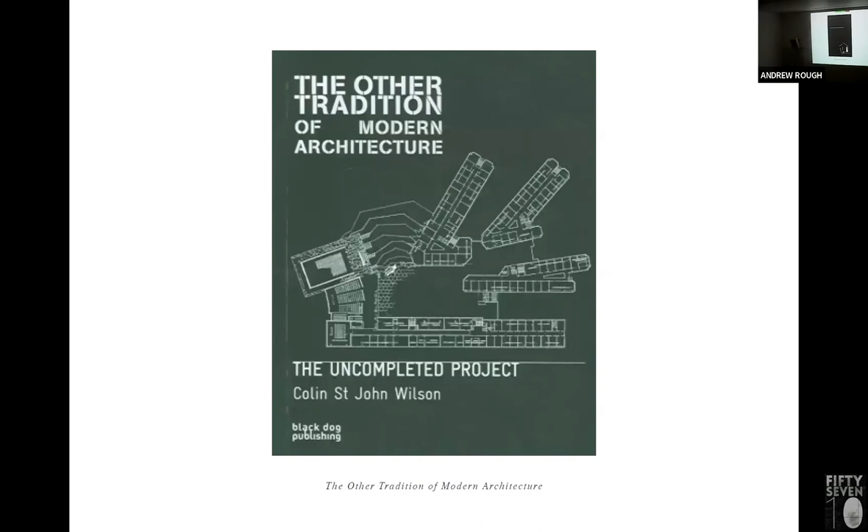So we draw a lot in the studio. We could draw more, as we've missed it, particularly in the last couple of years. Keen to get back into the studio, we like to get the rolls out and draw and think about ideas, and draw over each other's drawings. We're not precious about these things.

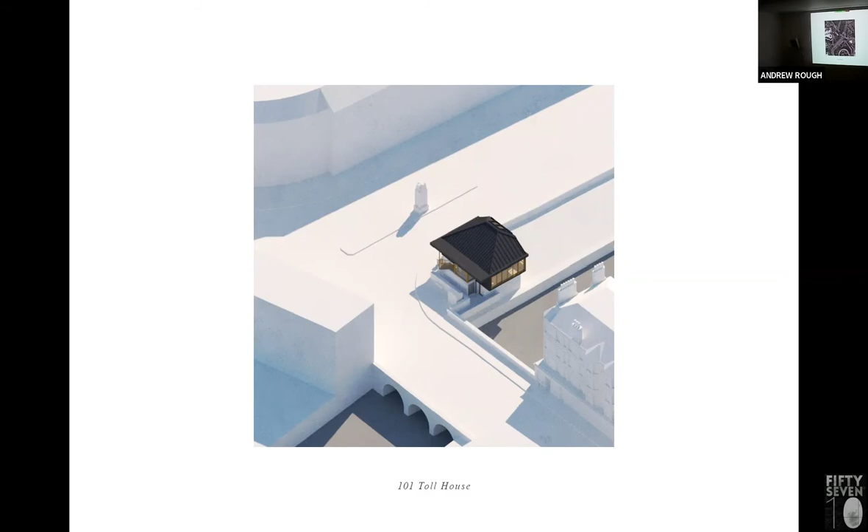So that's an aerial view. If you go down through the New Town, to the north of the New Town in Edinburgh, there's a major street called Dundas Street, and this confluence flows from Broughton Street, from Dundas Street, and from Trinity, all joining at this junction. Underneath, you're not really aware of the Water of Leith as it tracks along, because it's beneath the city, but it's a very significant node.

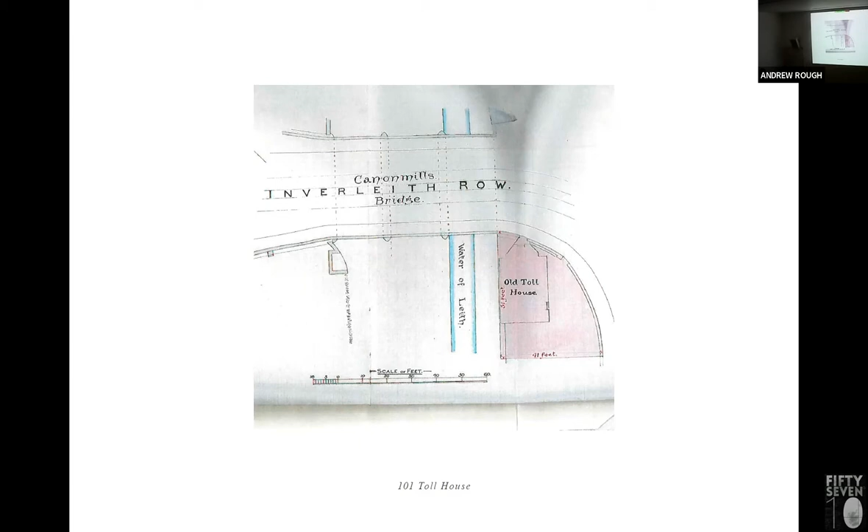It was the site of a former old toll house, where the bridge over was in and out of the city. There was a building on the site prior to what's there now, that acted as the toll house for the bridge. It's now, and has been since the 1980s, public toilets.

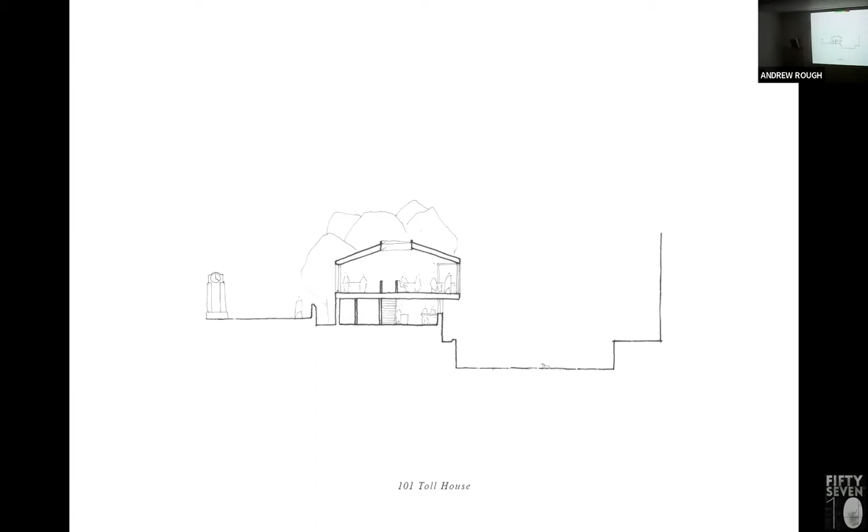So the first thing we thought was important immediately was the section - what do we do with this? We were really confined by the footprint of the building and very small slivers of land, so we couldn't go out the way, we had to go up the way. Instinctively it was thinking about what we do with these inherited features of the surrounding city - thinking about light, about connections through windows, about the relationship to trees.

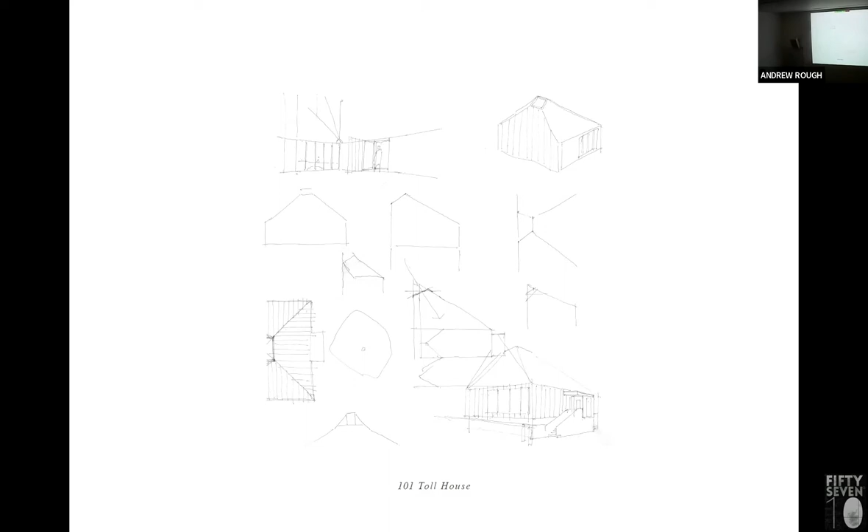We're constantly scribbling. This is a model from the water side, and effectively what we did was take the roof off and extend up to create a new pavilion that sat on top of the existing brick enclosure. What was important to the project was that we had to work with the existing structure and foundations, as well as the significant issues of proximity to the water and significant bus routes.

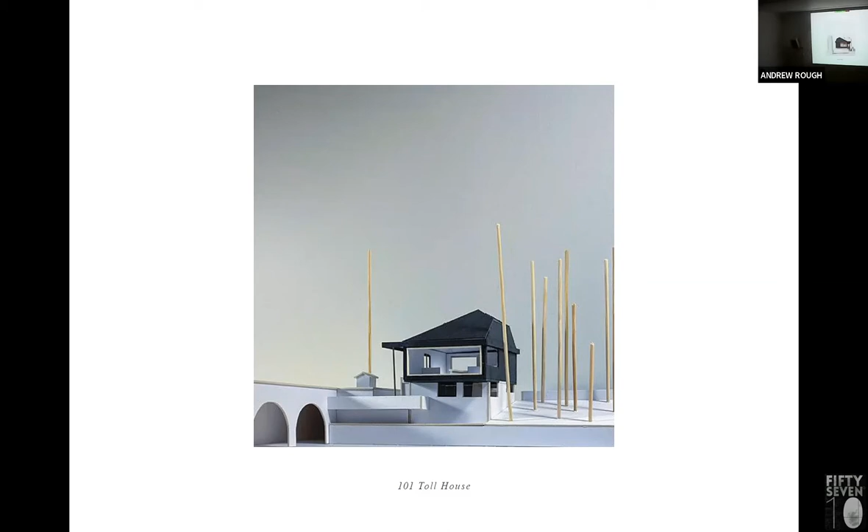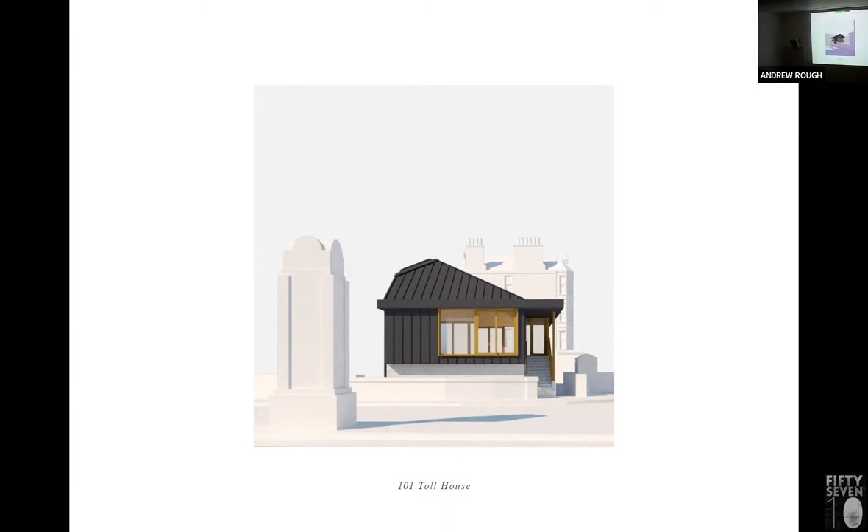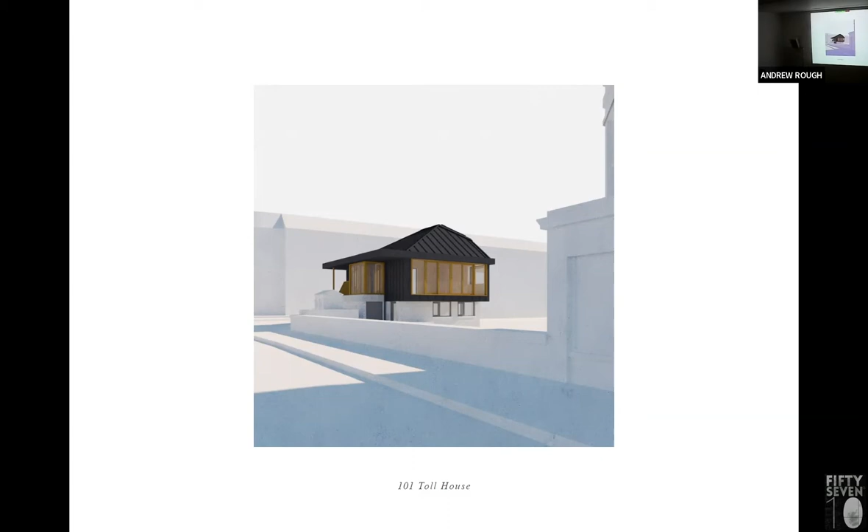There was a small set of steps down to the footprint of the existing building. We've reversed that and put a set of steps up that actually animates the corner of the site and opens out onto the corner. There's then a big window, a civically scaled window that looks back towards the clock. Another big window, for obvious reasons, opening out over the river. We cantilevered the pavilion front and back to try and get as much bite in and get some more space, really for the use of it. And then the new entrance lobby on the corner, which axially was positioned so that as you moved up and down the stair and in and out of the building, you were focused on the really beautiful mature tree on the corner. And then this smaller horizontal window.

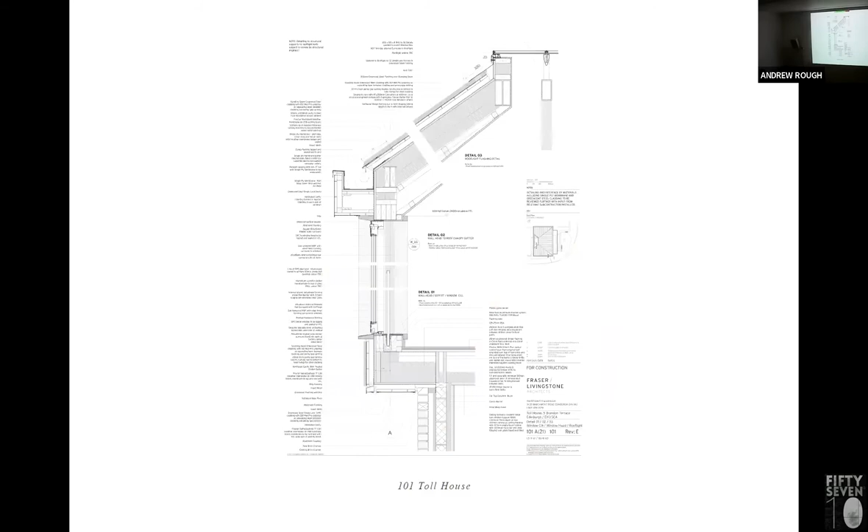What we had to do was make sure the building could be used appropriately, and it couldn't all just be glass because of the small footprint. The building was designed initially for a developer client we're working with, and he wasn't totally sure what he wanted to do. Through evolving the brief, we eventually settled on a restaurant building, primarily because of the confined nature and footprint, and also issues of access for public buildings.

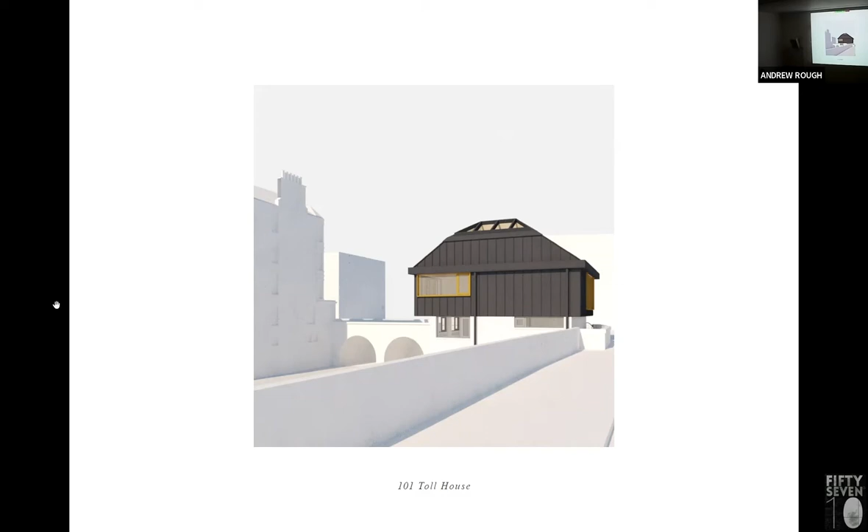So the other key move I forgot to mention was the section. This image is a little bit abstract in that you wouldn't really see or experience the building as you see it here, because you've got lots of trees in the way. As you move up that forestair and round the corner, you come in and you've got this big trapezoidal roof light that catches the sky - another significant move that we wanted to use to make you more aware of what was already there in the city.

So the other issues in a practical sense were just how we cantilevered out over it, and what materials we picked had to be lightweight. We couldn't extend it up in masonry - it would put too much weight onto the existing structure. So it's a very lightweight structural steel frame with timber infill.

We selected - we thought about timber cladding, but in proximity to the water and also the busy vehicle route in and out of the city, we just felt it wasn't appropriate. Also, because of the close proximity of trees, we felt it wouldn't weather well over time. So we ultimately ended up with a metal cladding that could wrap the new form, with a new language that sat on top of what was then proposed to be painted white. It gave it a new identity.

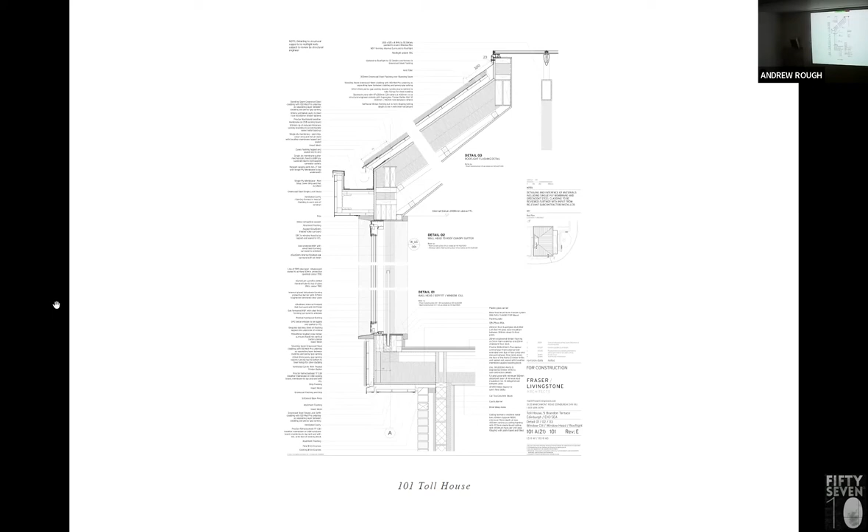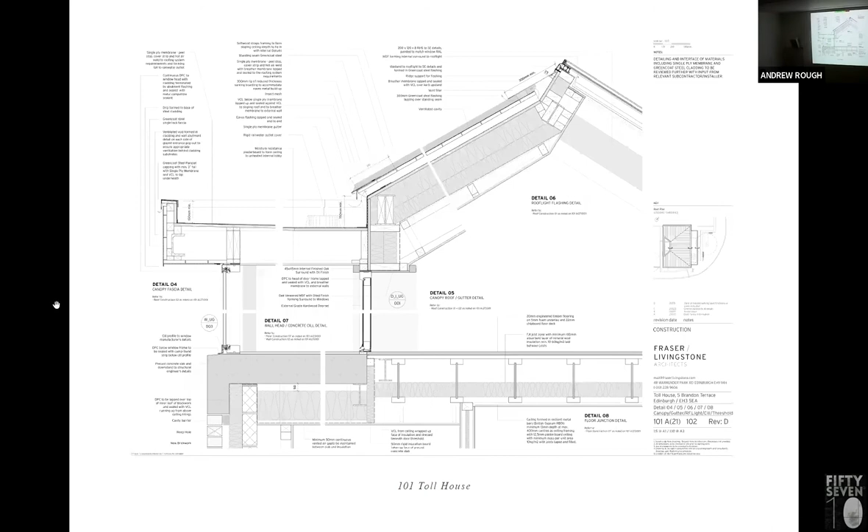Other practical things - we couldn't get rainwater off the roof and into gutters when we were cantilevering out over the water. So it fast became apparent we actually needed to get essentially a gutter all the way around the building. We played around with different options and ended up with this quite chunky, robust gutter system that allowed it to feed into rainwater pipes, getting water off the roof and also helping with long-term maintenance. So it's about thinking through these practical things while also creating a language for the building - one that sat and created a canopy over the forestair and the entrance through the trapezoidal roof light, the upper level, and then the entrance lobby canopy.

So these are just a series of photographs. It's getting towards completion. There's a new restaurateur just come in recently who's going to take it on - a Michelin star restaurateur. You start to get a feel for the connections.

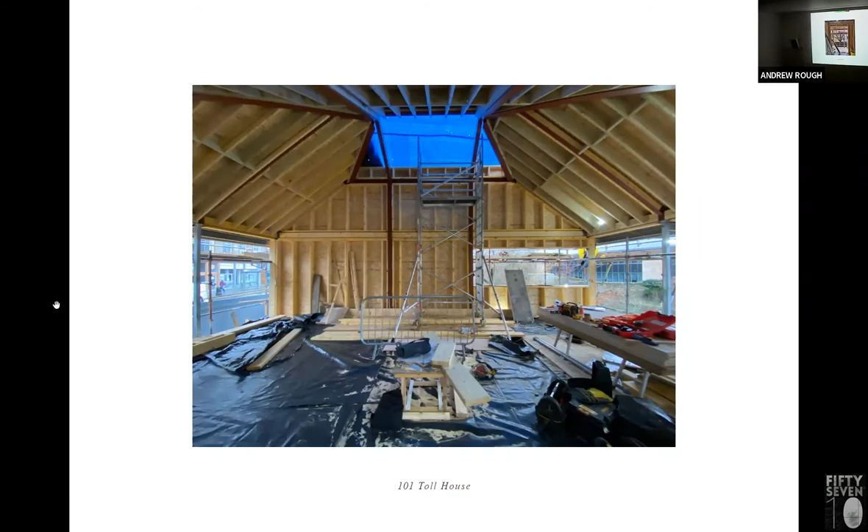The river to the right-hand side, and the longer views down the river to the west. The city to the left-hand side, and although it's covered in blue tarpaulin in this photograph, the treetops above. Then as you turn to go back out the way, that tree faces you through the glazed entrance door - that's the inner lobby door, looking through the new lobby.

This is it starting to get lined out. You get a feel for the connections to the clock. We were thinking about this where there's always double-decker buses sitting, and how that could be a really nice moment moving around the city in and out, with people getting glimpses into the building.

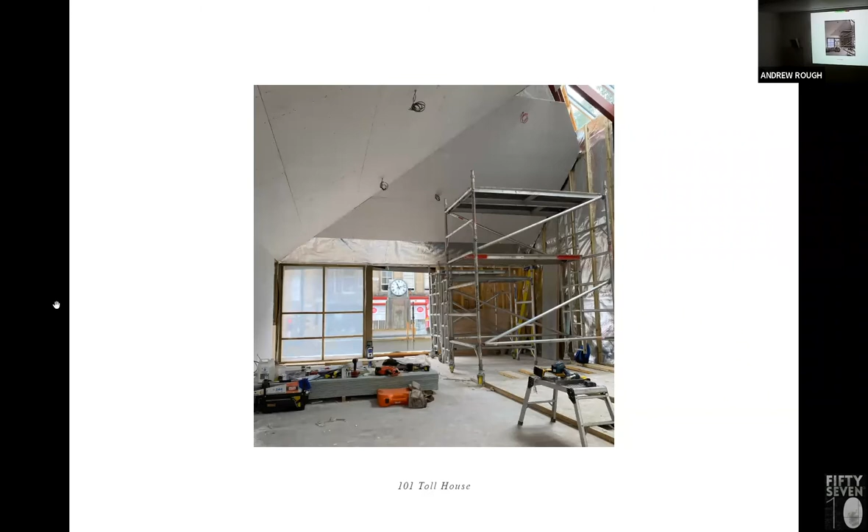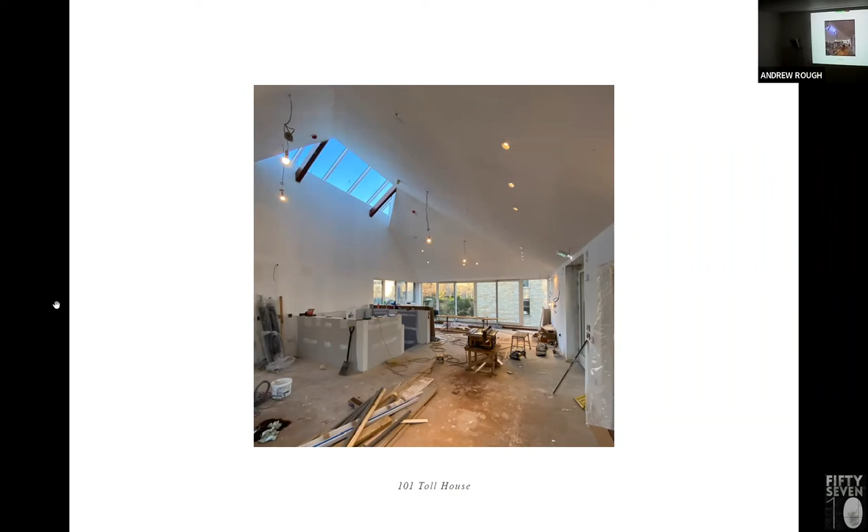So it became almost more civic in nature. Start to get a feel for the sectional qualities. You can't see the tree tops there, but they are there. Again, it's just because it's the winter time, but you'll get the tops of the trees projecting up into the sky.

But there's also then going to be a terrace that projects out over the water. And then you get a feel. So it's going to be called the Toll House, which has had some unkind jokes about it, with it being a former public toilet, but we still like the idea that it speaks of the history of the Toll House being on the site.

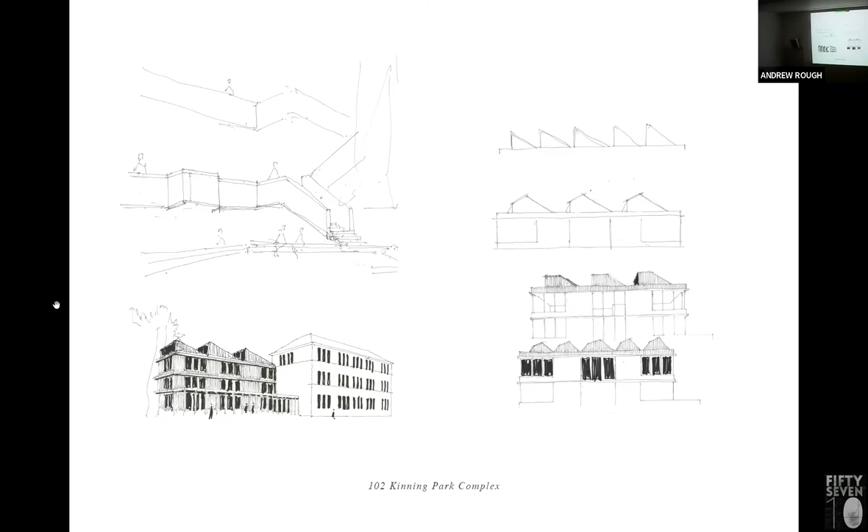So these were some images that Andrew in the office did. You can see the entrance there, just that sits between that colonnaded cloistered walkway, and then the timber-lined stair heading up through the centre of the plan with office wings on either side. And we wanted to build it in solid timber construction.

Malcolm Fraser Architects did a number of buildings, including a nursery building for the University of Edinburgh in CLT, and we also did another building for the university called the Edinburgh Centre.

That's a preoccupation of ours. We're obviously aware of the climate emergency, and we think it's important that we push this as much as we can. Malcolm in particular is engaged in advocacy work and lobbying to try to create a local Scottish industry that uses or produces mass timber, rather than us having to import it from Spain, Austria, or Germany.

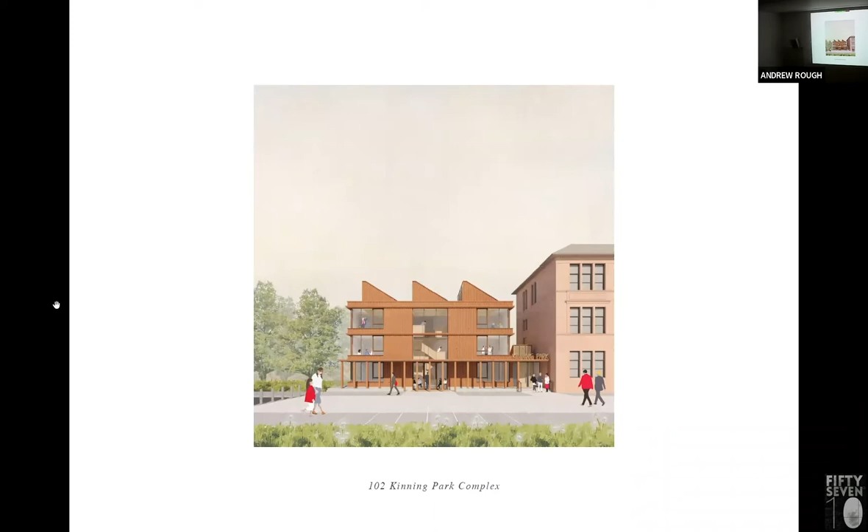So it was a CLT structural building, and we were keen that the insulation externally etc. would be a lightweight cladding. So we looked at a vertically corrugated metal cladding, but that still spoke to the existing school building next door.

Just a cutaway section showing the roof lights, bringing the light down into that vertical circulation space, and then that timber-lined staircase and void with the forum space below.

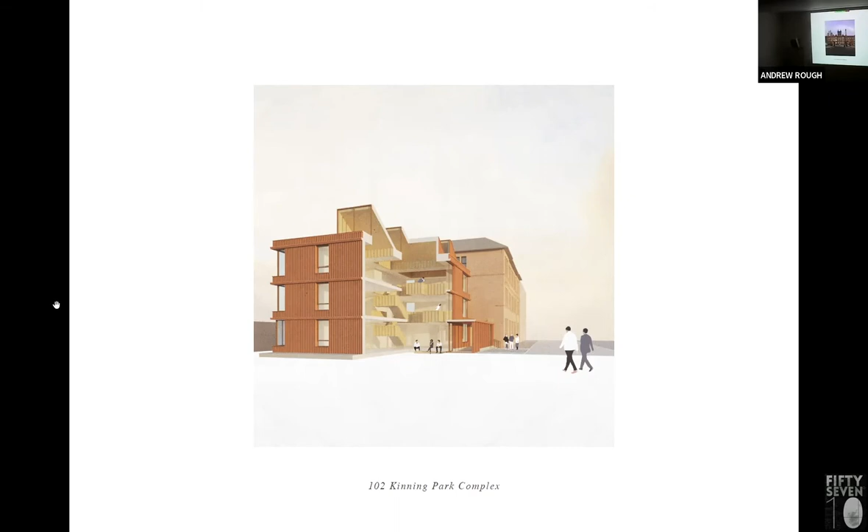Lots of this thinking we employed in other buildings. We like to use timber internally. At Scottish Ballet in Glasgow, we created a new central gathering space there that's timber lined. The Netherbow, and various others, were done formerly by Malcolm Fraser Architects.

This was another early project. Thackray Medical Museum is down in Leeds. It's close to quite a deprived residential community called Hare Hills. I think I'm right in saying it's one of the biggest medical teaching university campuses in Europe.

This is a museum building, but you can see the tower over the top of the building on the left. It's for nursing, midwifery, and for doctors as well. So this is a museum building that they wanted to develop.

They were actually going through an initial phase that Simpson and Brown were leading when we were asked to look at opportunities for a second phase. That work, I think, is completed quite recently.

So they've done lots of good internal refurbishment work. Longer term, they're thinking about converting other elements of the building into conference facilities and other uses. With the building they have, they wanted to reach out to this community that passes their front door every day. It's quite a severe, closed-off building, and they wanted to encourage more local residents to actually come into the museum.

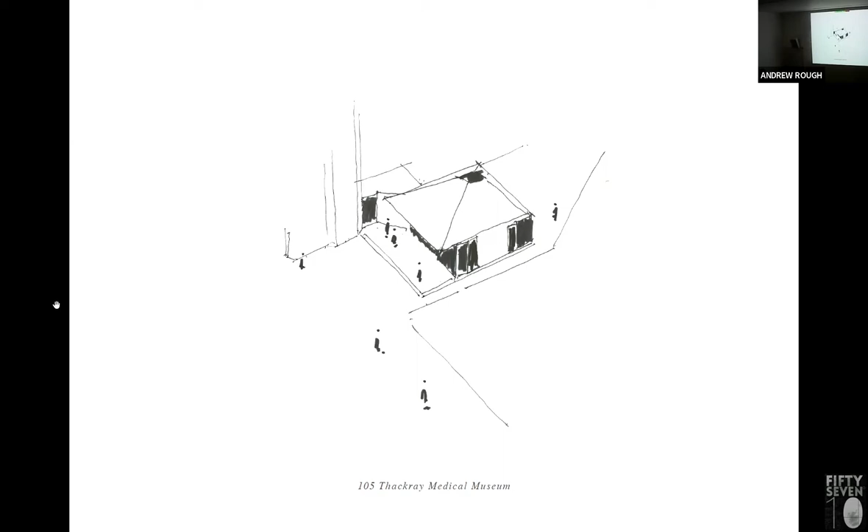So these are little scribbles about how we might engage with the existing building, create a new multifunctional space that could be used by the community, could be used by the museum, engaging with the existing building, but transforming it in as subtle a way as possible—something that acted as a lantern, I suppose, to the community.

So this was just a very quick idea of where the building might sit, how it might glow, how we might illuminate the existing tower, and how it might reach out physically and visually to that route in and out, heading into Hare Hills and back into the city centre.

And then you can maybe subtly see we were interested in the use of two different colours of stone externally, as well as feature brick banding of two different colours.

So we liked this idea that we might create a promenade that would be a shared surface lined in cherry trees—there's a huge cemetery directly across the road. We'd create a promenade to the entrance, and this surface acted as a threshold that almost felt like it was part of the existing building.

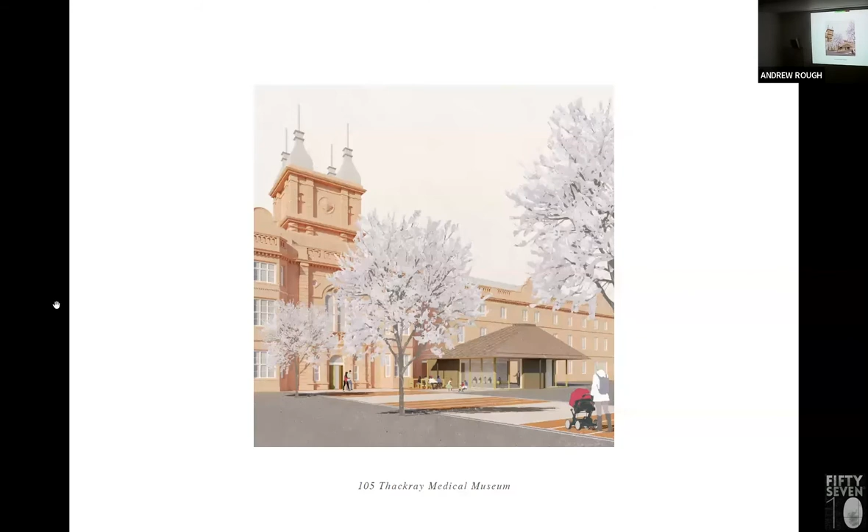So you can see that surface treatment leading up to the entrance, and then this new lantern pavilion sitting to the side, and how that might open up. It might create a space at the front of the building, as well as be used in a multitude of ways.

This is a project that I worked on back—it's now going back 12 years ago. It's a housing project on a site to the north of Kinross and Milnathort, in Perth and Kinross.

It's a mature woodland, and just in the middle of it there's a clearing that was the site of a former tuberculosis hospital—a really quite large, imposing building on the skyline. That sat in the middle of the site and then had lots of outbuildings. So when you were severely sick, you would be in the main building, and as you started to recuperate, you would move to the outbuilding stretching out to the east.

You can see it slopes up to the north—this is the start of the Ochil Hills that really begin here and stretch west through Clackmannanshire. That's the woodland in the foreground, with connections south down to Kinross, to Milnathort, and all the way back to the Pentland Hills, way past Edinburgh in the distance.

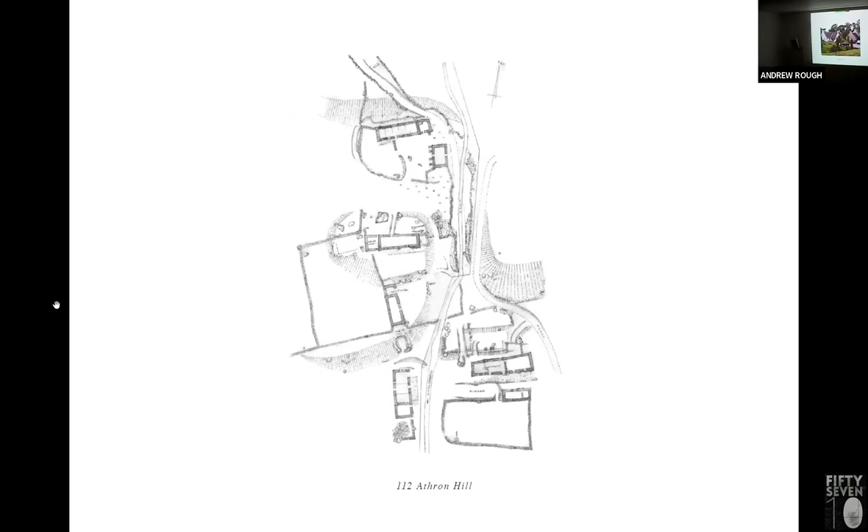These are different buildings—the one on the left is just outside Bankfoot, heading out to Perth. We're interested in that simplicity of form. An important preoccupation for us is that striving for a sense of calmness, but also a character as well.

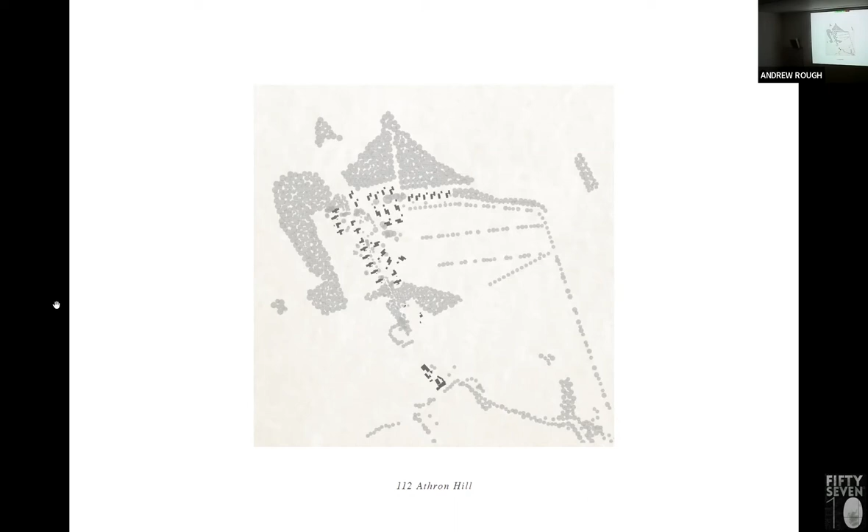So the site plan—the lower darker block is an existing farmsteading that sits off the site. There's an existing linear route that stretches north and then swings round to the left. What we did was essentially start to stitch these into the mature woodland. There's a pond in the middle of the site, or areas across the site, and we had to come up with a sort of kit of parts of houses that responded to the different character areas.

This went quiet back at MFA days, lay dormant for a while. Then when Malcolm and I set up again, the client came back and said he wanted to get the site moving. We were initially instructed to take forward the first 11—it's 35 houses in total. There's a core site, essentially the woodland, and the ownership is much larger. There's a reservoir to the north, and lots of land to the east and west—if you move into this community, you get shared ownership of the wider parkland site.

We came up with this idea of a toolkit of houses. As part of the planning consent, we enshrined the principle of a basic house that over time you could extend—with a granny flat, a home gym, whatever you wanted it to be. We also enshrined the principle of a limited palette of materials that allowed a natural variation to occur depending on what each purchaser wanted for their own home.

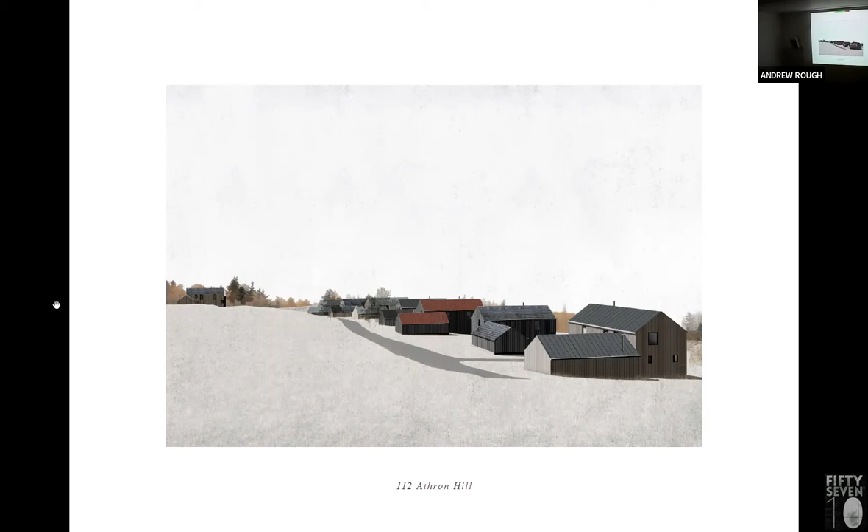So you start to see these buildings turning against each other, creating entrance courtyards, as well as connecting to longer views, and how they start to set up a rhythm against each other, turning against each other as well for privacy.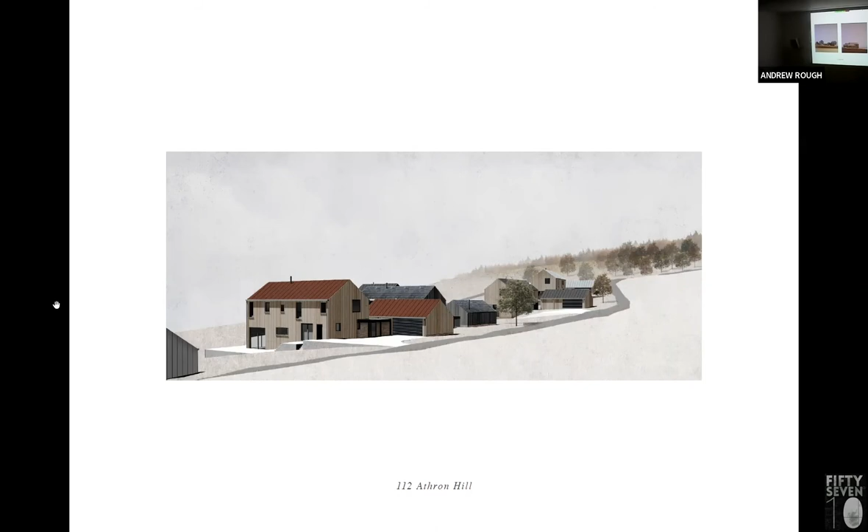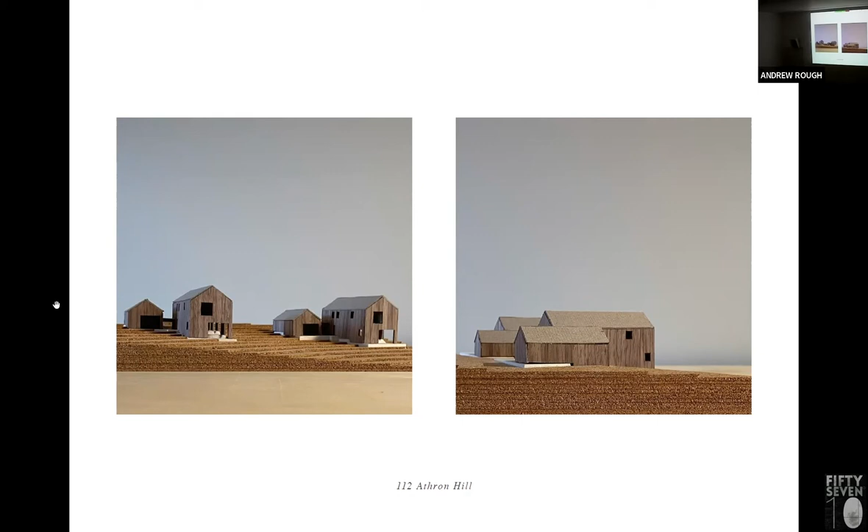And you start to get a feel for the steeply sloping nature of the site as well. As part of the first stage, we were asked to look at two house types. We had to refine and, that dreaded phrase, value engineer them to get them to stack up in terms of a funding model as a kickstart development.

So these are some of the marketing visuals. The idea is that the buildings are turned, and rather than presenting a look towards views, we presented the gables. It's obviously a very sensitive site, and to get the planners to buy into the idea of development, that was a really important step, to turn and present gables, so you could see through the built form to the woodland and natural environment beyond, addressing the issue that other developers may well have gone down the route of creating a slab of development on the skyline.

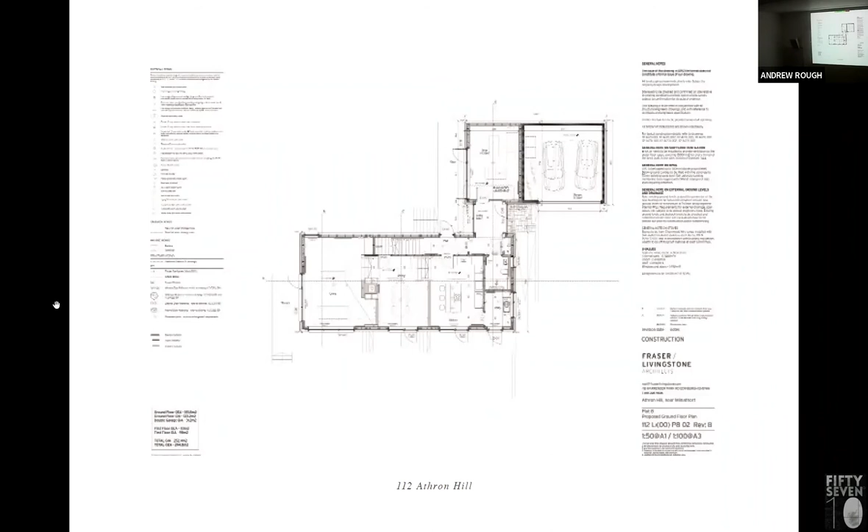So these house types integrated garages, snugs, and entrances between, working with an L-shaped housing type and a sort of slipped-plan H or Z-shaped house. You can see in the section it's open plan right the way through the ground floor, working with the steep slope to create living spaces and how they connect, with a fireplace sitting at the centre.

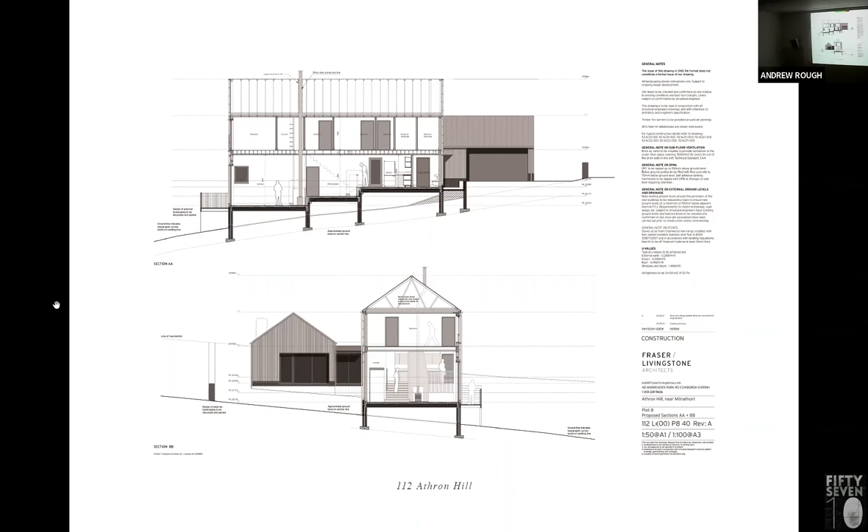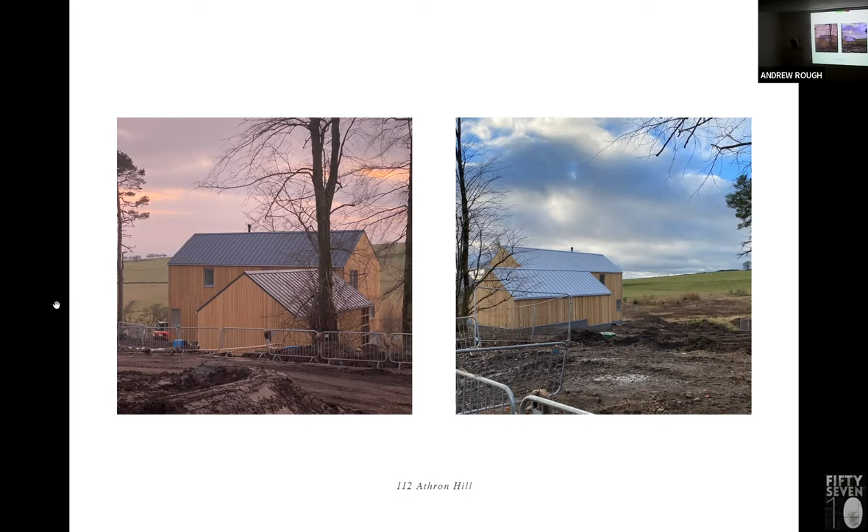These are just some recent images of the L-shaped house and the slipped-plan shaped house. We're using an open-boarded larch cladding, which is used in lots of the surrounding agricultural buildings, as well as metal standing seam roofs of different colours and variations. You get a feel for the open-boarded cladding there, how it sits against the trees, and then the views through.

So the thin house footprint really allows a different approach compared to the volume house builder housing happening across rural Perth and Kinross, which places all the emphasis on making it look like your own castle with the front door facing the street.

So these have all gone - I think we hit the market at the right time, there was such demand. We've now been instructed to take forward the next phase of another 13, and just a couple of days ago, the remaining 11 plots.

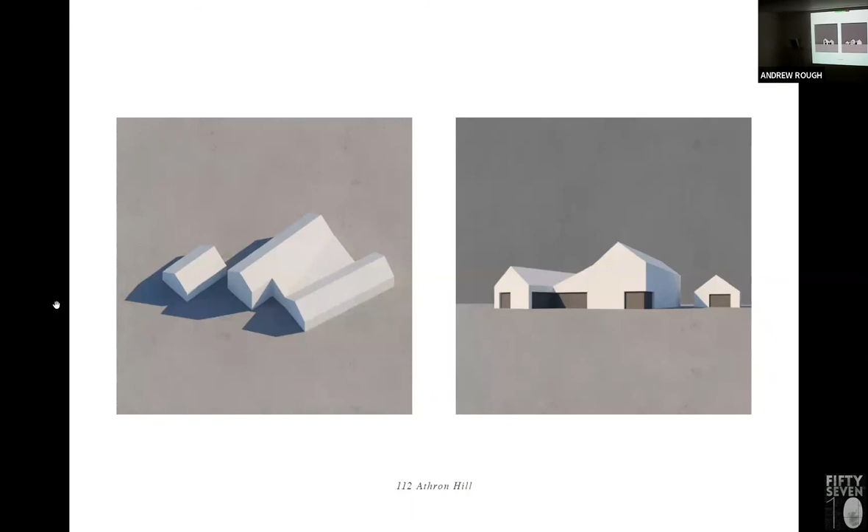So there's going to be different house types across the rest of the site, which was always enshrined in the planning consent anyway. We're starting to progress larger house types, buildings that sit and respond differently - these are houses that will sit on the footprint of the old hospital, so they are flatter and have a larger presence on the site. We're also developing others on quite steep sites, with separate garages and routes up to the new homes.

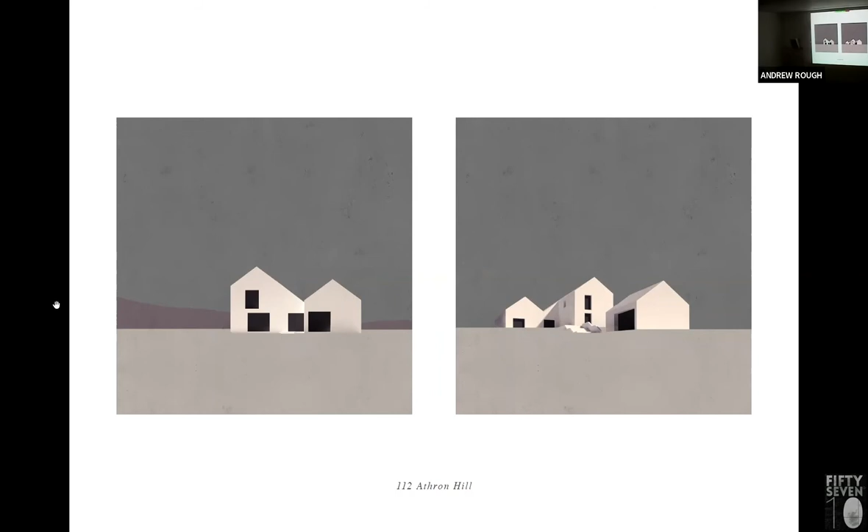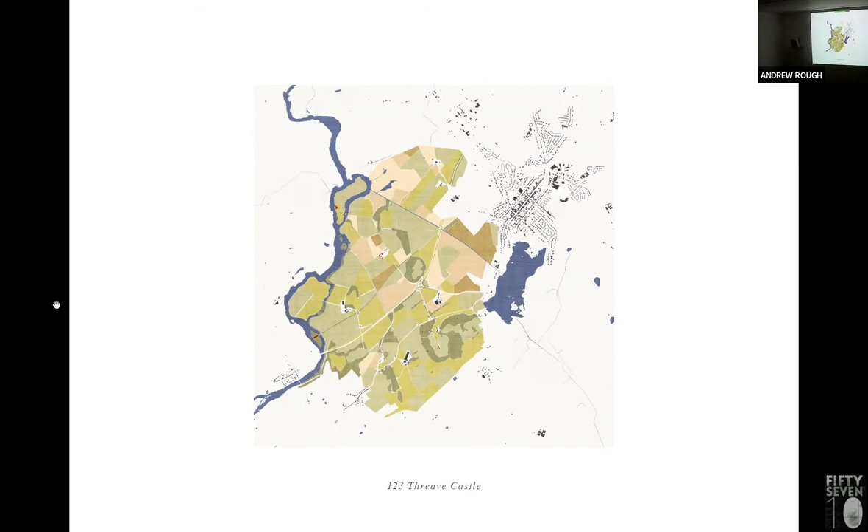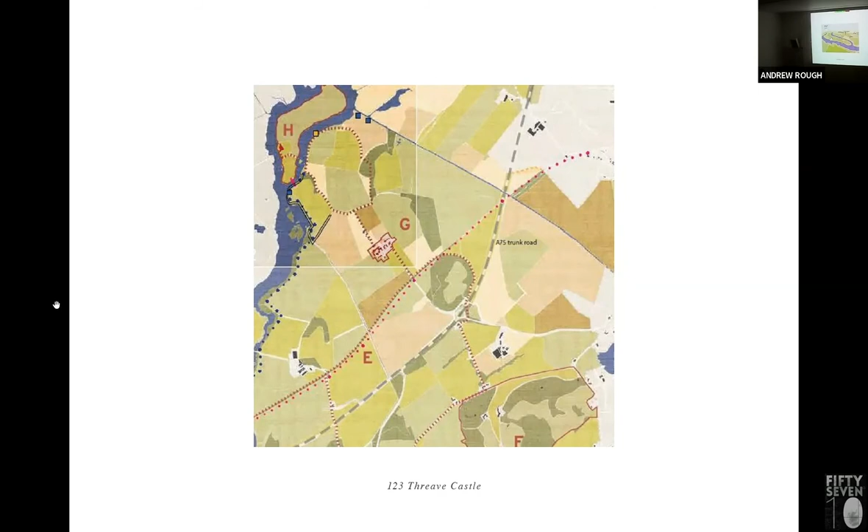So these are some images that speak of that. Obviously with Threave Castle, rather than just going on this loop through the landscape and going straight to the castle, we were keen to actually insert something into the landscape that allowed you to go up and see the castle from a distance, understanding how it sat within the wider landscape, and the fact that it sat on an island surrounded by water.

So we came up with this idea of a timber eyrie, effectively a viewing platform that you would go up into, giving you a much greater understanding of the wider area.

Just scribbles that Andrew did in the office, the Kelton Mains, how we might wrap a cloister and create a new central civic space that, if it's bad weather, you could still be outside but under shelter. You would move into different parts, from ticket office to cafe, restaurant, and there was also potential for one of the buildings to become an event space for weddings and things.

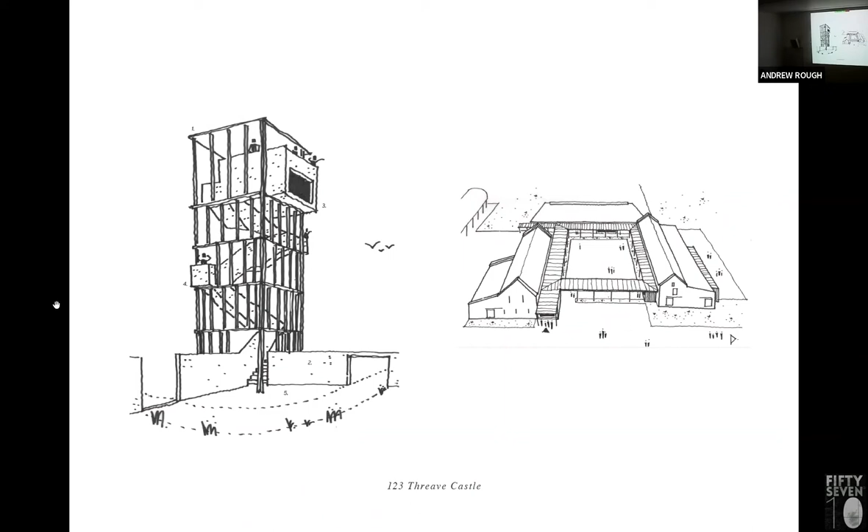And then some initial thoughts on how our timber eyrie as a viewing platform would choreograph a route towards visiting the castle. This is a building we're doing in central Edinburgh, just off the Pleasance.

A very difficult site. Other architects had a look at trying to unlock it, with no success. And so we got involved.

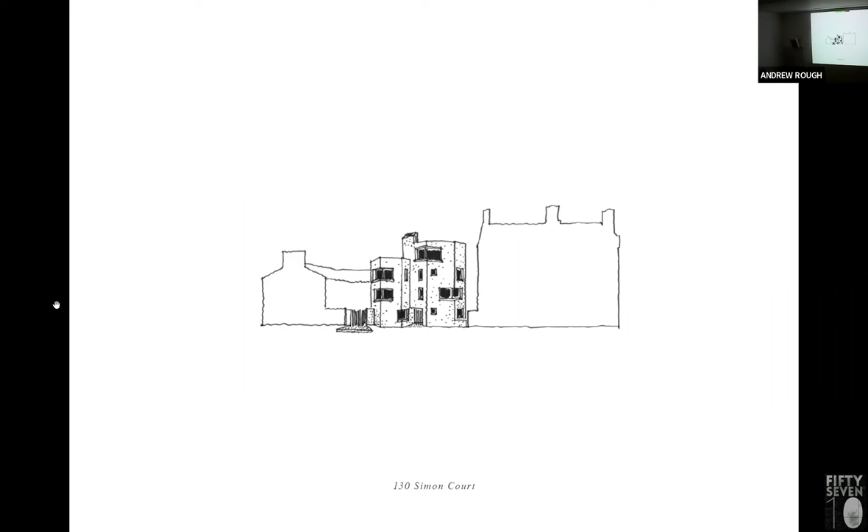So a little scribble of what we were thinking, effectively pulling the building as far away as possible from the two-story L-shaped building, and building up against the gable end of the existing tenement, and how our new building might mediate between the scale of the two.

This is an axonometric, again showing that four-story block up against the gable end, then stepping down to form a new roof terrace from a rooftop pop-up, and then the 3 stories sitting with some equivalency of scale next to the two-story L-shaped building.

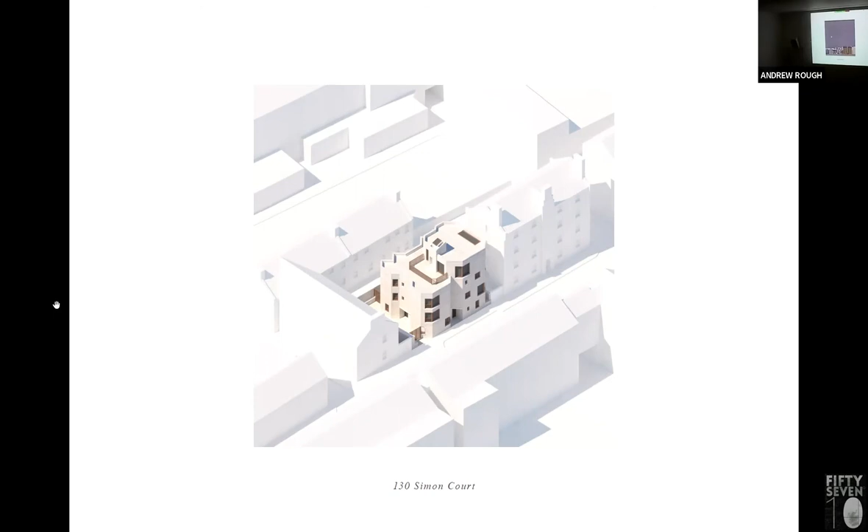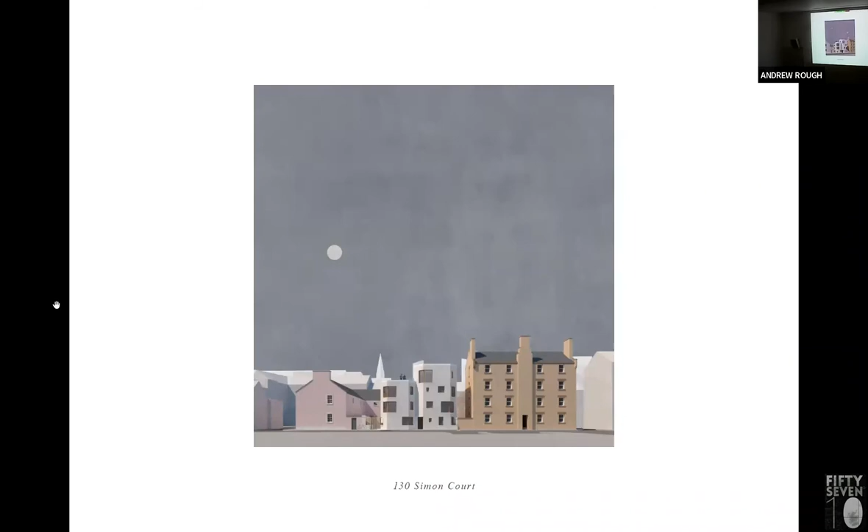Again, similar images that show the intent, and the idea of the architecture came from - I'll get onto some plans, but effectively part of the issue was we had to... in fact what I'll do is I'll just flick through these and then go back the way. I want to get to a plan.

So chamfering the corners, rather than making it very boxy on the site, we gave it this faceted language that came right the way around the building. And then as the building stepped up from 3rd to 4th floor, that form would fold in, and it all became this coherent building with a singular language.

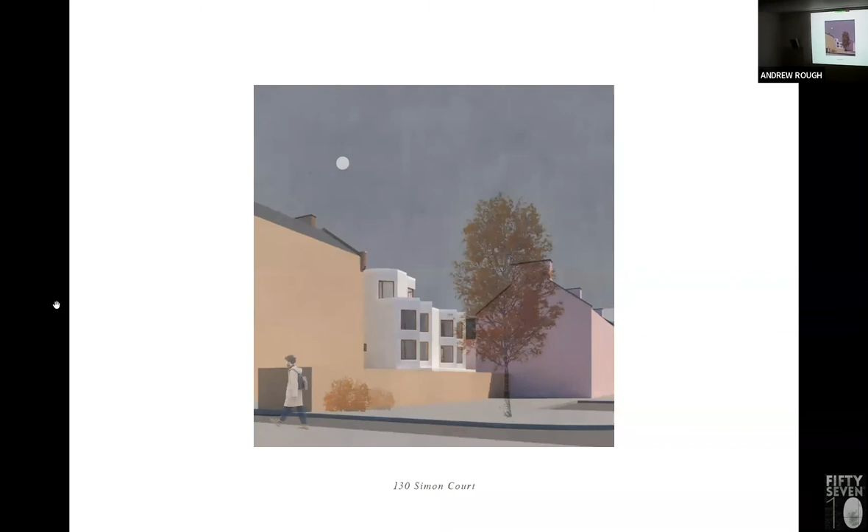So sorry, I'm going to jump back here. That's the back elevation with the zigzagged, serrated windows looking back towards the mature trees. That's it from the street, with the chamfered corners and the windows turning the corner.

And what we did was - we tested the language as quite repetitive and singular, and realized that wasn't working for the very tight floor plates internally. We really had to design the building from the inside out, then the outside in, then the inside out again, which I suppose all the best buildings go through. But the window composition is entirely generated from the internal plans and how we had to plan the apartments.

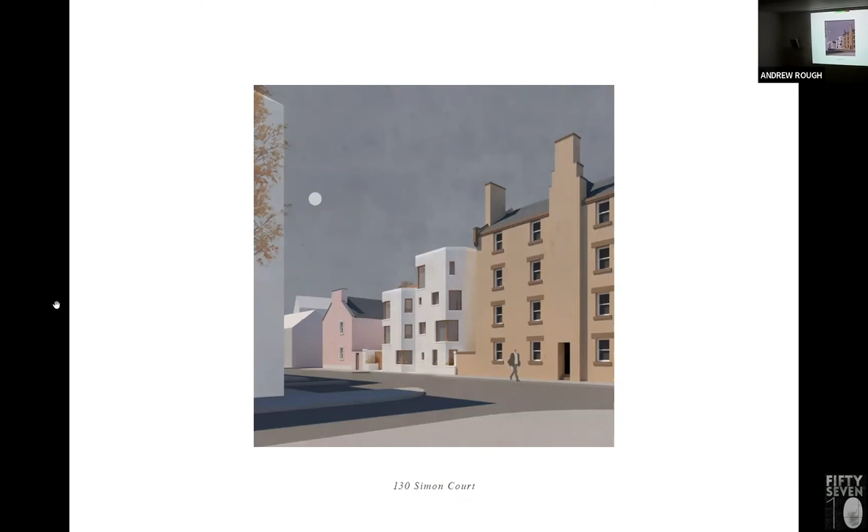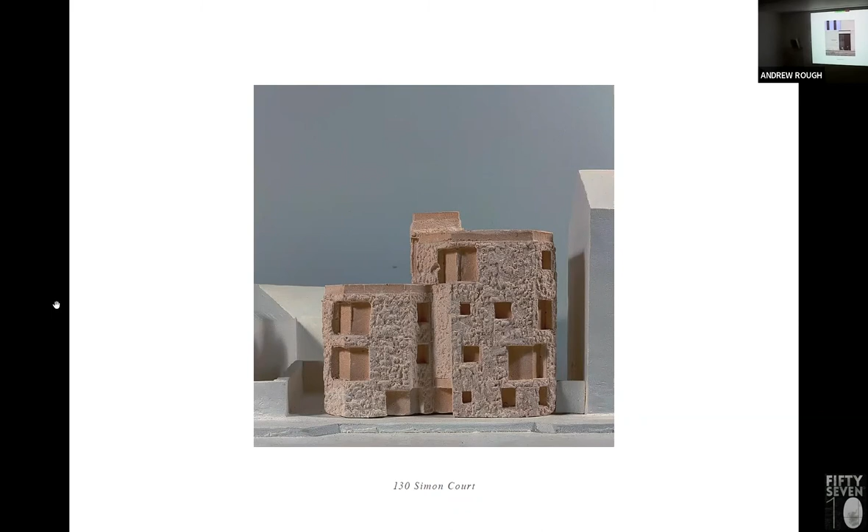And then another view with that chamfered corner condition as well. Some cast models - we were really keen that it effectively mediated between the rough coarse stone on the tenement on the right-hand side, and the rough harl of the two-story L-shaped cottage buildings on the left. You've seen from the photographs that the rendered building is a pinky color, contrasting with the more orthodox buff sandstone of Edinburgh.

A stone building has its difficulties, but we wanted something with texture and richness, so we were drawn to the Chipperfield building with a slurry coat across a brick leaf. In traditional Scots terms you'd call it a Slaister coat—essentially a brick external leaf with a slurry coat put across it. You still see the brick behind it, but it gives a more unifying feel. You can see the render on the left hand side and the stonework on the right.

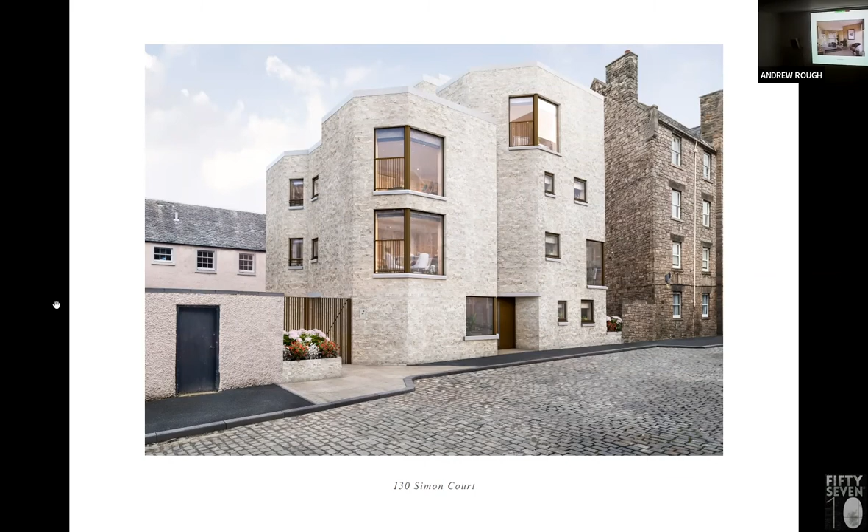These are sales images that were done.

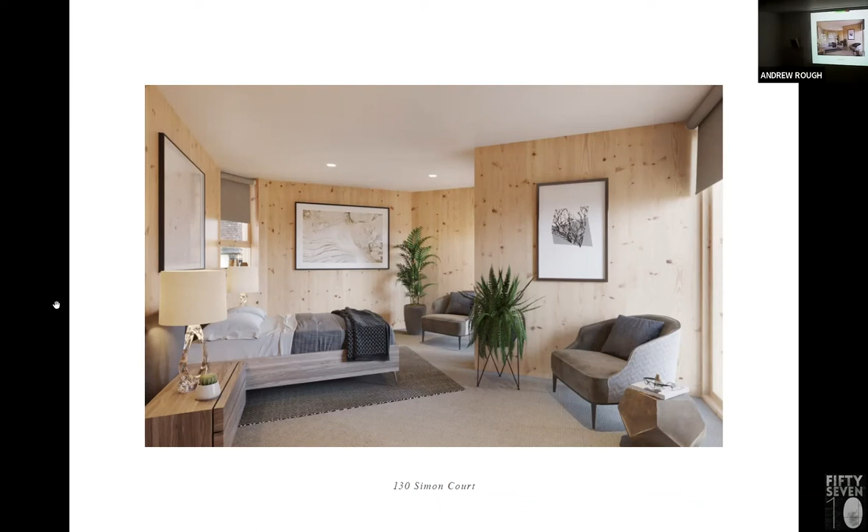The other main move with this building is it's built entirely from cross-laminated timber construction. The whole structure is formed in that, and then we insulate on the outside of that cavity wall, brick, and then the Slaister coat—with no membranes, no plastics or polythenes in the external wall construction. This keeps it vapor open to improve internal air quality, and we sought from the outset to expose the CLT as a feature. The smell of the timber being exposed is a really important quality, but that proved tricky through the building regulation process.

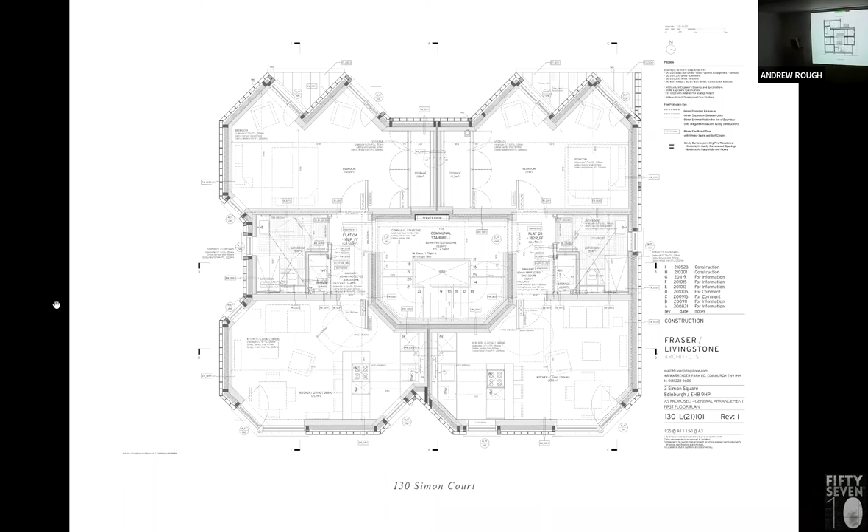This is the first floor plan. You come in off a courtyard and through a central stair core, and the flats wrap around the perimeter. The stair core rises up through flats at each of the first three levels, then there's a duplex from the third floor going into an open plan living space at the top, with access to a roof terrace that faces south.

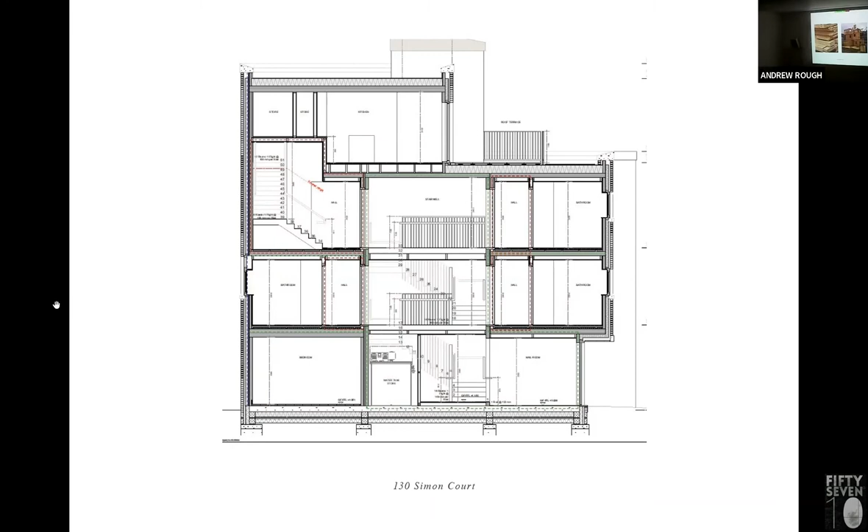The CLT frame—we still believe this is the way forward. It's erected very quickly, going up in a fraction of the time of a traditional build, and has the obvious benefits of carbon lock as well as the quality of the internal environment.

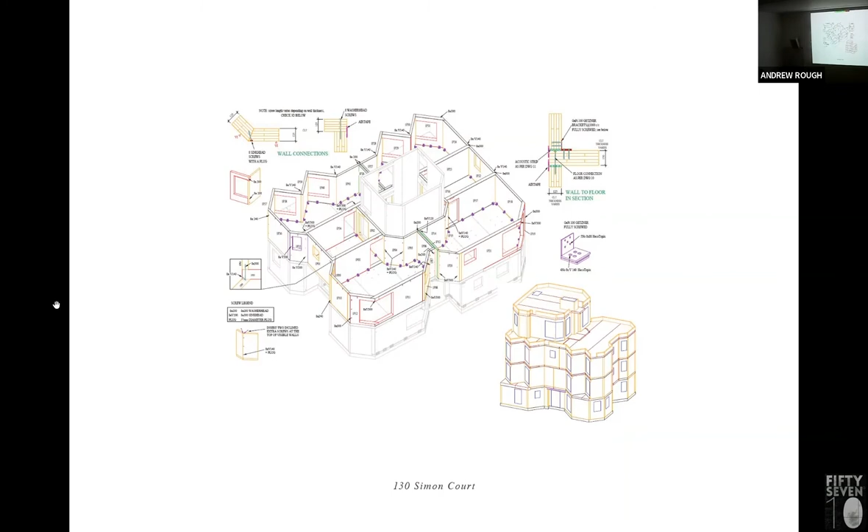Very, very involved process with the CLT, working with Egoin, who are based in the Basque Country. Going back to what I said earlier, we're very keen to lobby for a local CLT industry, but it's very much in its infancy, so this was imported from the Basque Country.

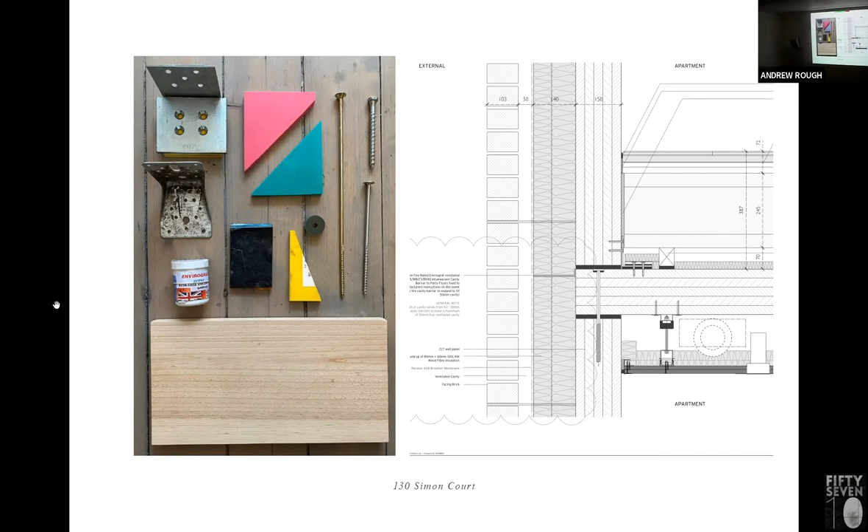What became apparent through the process—and we, Malcolm Fraser Architects, have built buildings with CLT in the past—but with residential, the issues of fire separation and acoustic separation were hugely onerous. So you start to see this kit of brackets and so on that meant we could achieve the acoustic separation, as well as coatings of the CLT internally to ensure it met the fire separation too.

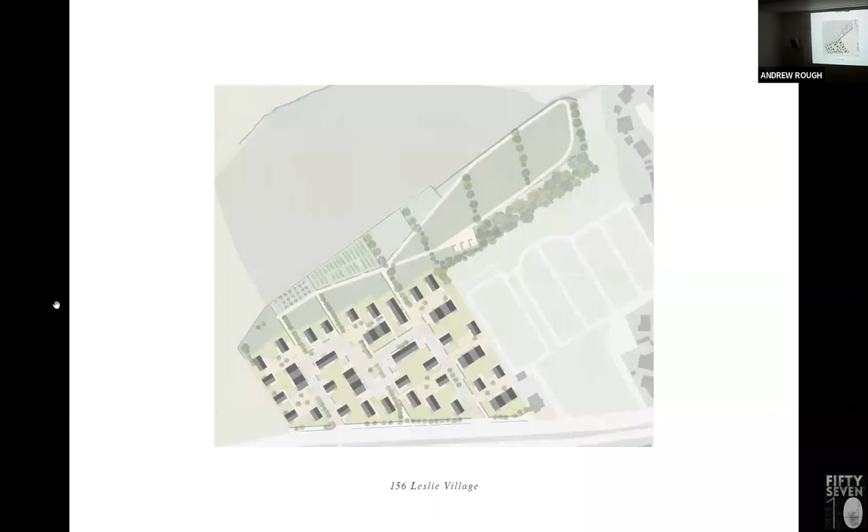And then the other element was creating more intimate courtyards. So you would move off the main streets, through entrances that looked around the site, giving access to these little courtyards, which were for parking but also for more intimate use by the residents, and hopefully kids can play in. And then creating this stretch of amenity space to the north, which will have allotments, community gardens and orchards that connect to the distant views.

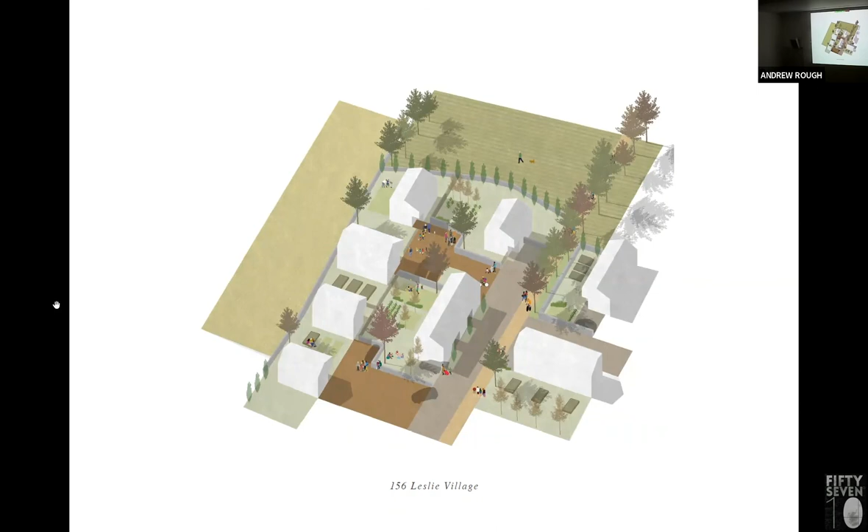So this is just an abstract image, showing that idea of courtyards and how you would move off the main streets into these intimate courtyards and then into your home. And this is an image just showing that approach, hopefully capturing how you actually see through from these courtyards to the distant views.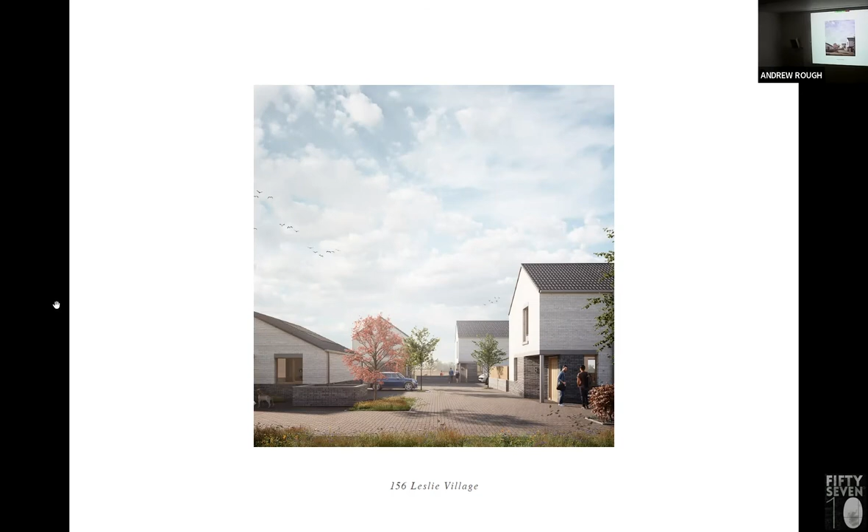You're not blocking the views, both for the new residents as well as the existing community, and how those courtyards might then be activated and occupied, with entrances carved out of corners that you enter off from these courtyards.

This is just this very recent project, although it's been around for a while. It's just a single sketch, but we're looking at an old school building in Kilkenny over in Ireland for an animation studio, and how we might transform that building into a new purpose-built facility for them.

It's got great connections to the Kilkenny Cathedral and the Black Abbey. It's the smaller one to the right-hand side, and we're looking at how we might convert and then remodel to create new screens, etc. So that's one that is very early days, but we're going to start to work on over the next—well, tomorrow.

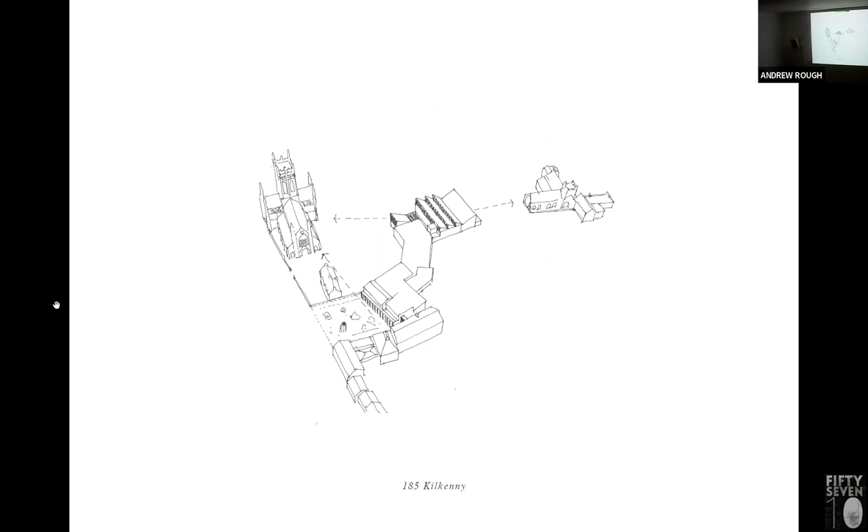We've been asked to look at this, and we've done a feasibility study to convert it, to improve their accessibility as well as the flexibility of the spaces internally. So how might we do that? Give them a better frontage, an active window onto the main street.

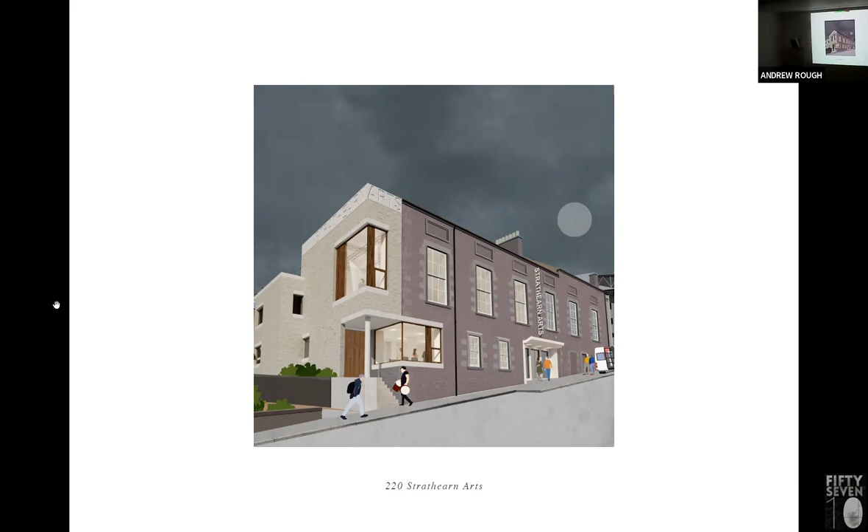Signage might help give them a greater presence in the town, and how that big corner window at the high level might open up to views out, down the valley to the distant views over the countryside. Either during an event or at the end, shutters open and reveal the context.

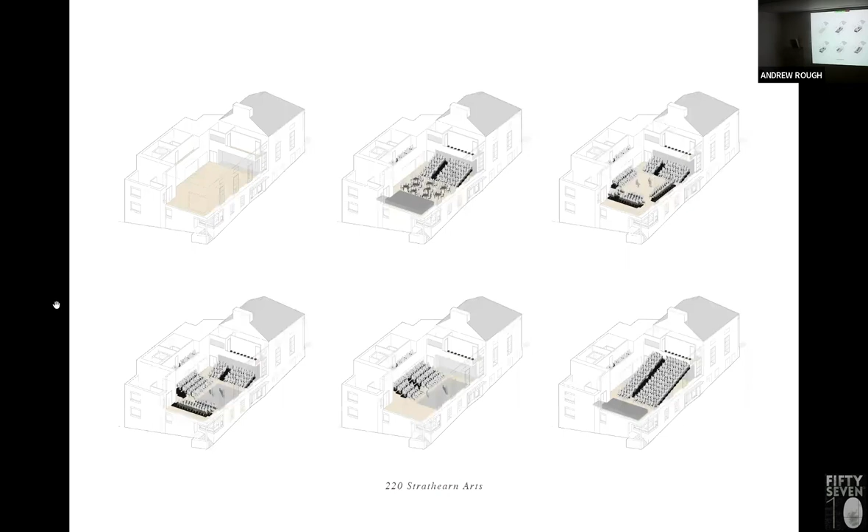These are just some diagrams that Emma pulled together in the office, looking at and exploring flexible uses for the internal space, and how events might change and adapt depending on what it is and what numbers they need to include.

This is a nursery building that Malcolm has been involved with, with a community group, for a long time now. It's an existing park in Blackhall, where there's an existing building used for changing rooms, etc. by the community. There are football pitches in the park, but it really doesn't do what it needs to do. And the community got together.

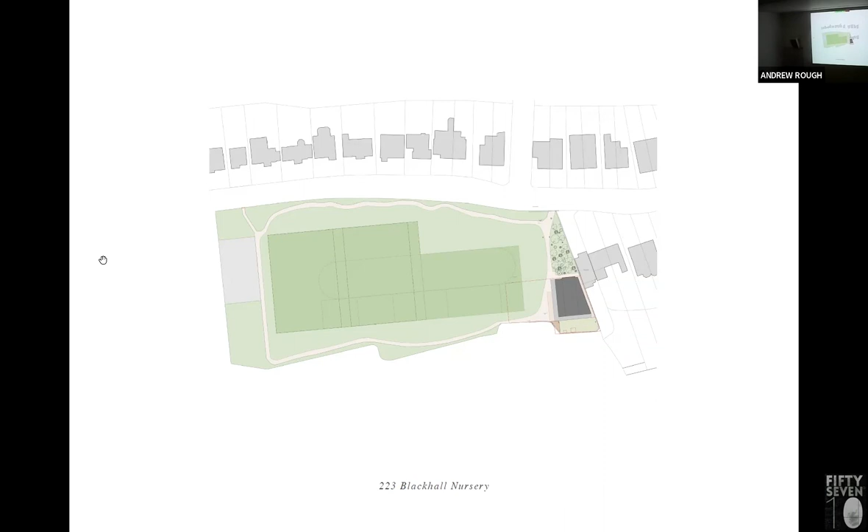We're going through funding applications just now, effectively creating a new mixed-use community facility, as well as a nursery, for the local community. So the existing building isn't fit for purpose, but we can't build onto the existing park for obvious reasons. So we need to still build on the footprint of the existing building, nestled into the corner of the park there.

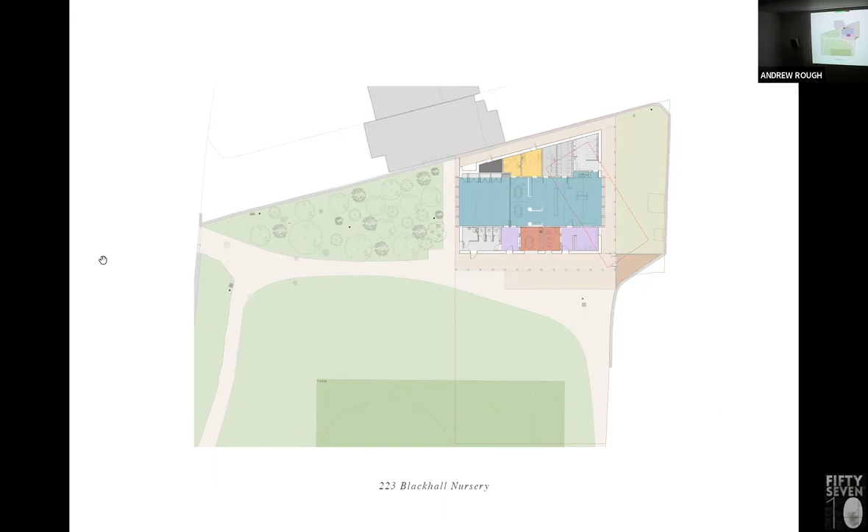What we are doing is effectively creating a building that during the day acts as a nursery, so there needs to be security. On the right-hand side of the plan there's a route from the main access road, on the left-hand side, and then how the building could then be used at evenings or weekends as changing facilities for the local community, for kids' sports, etc. So it's a building that's a private nursery during the day, but also a community facility outwith those hours. You can see on that plan the footprint of the existing building in the red angled rectangle.

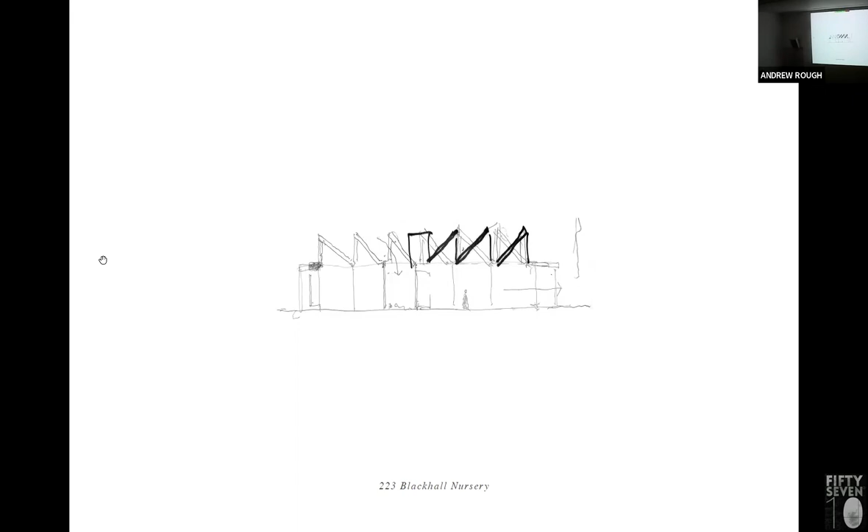Ideas of how we might unlock a section in a single-story building, where we need a nursery space that can be adaptable and still bring light in. So again, a building that has, I suppose, a civic emphasis, with the colonnaded cloistered walkway that wraps around three sides, and then these triangular roof forms, roof lights, that bring light into the plan through the depth of the plan.

So again, this is out for funding, and we hope this is going to be put in for a detailed planning application in the next couple of months.

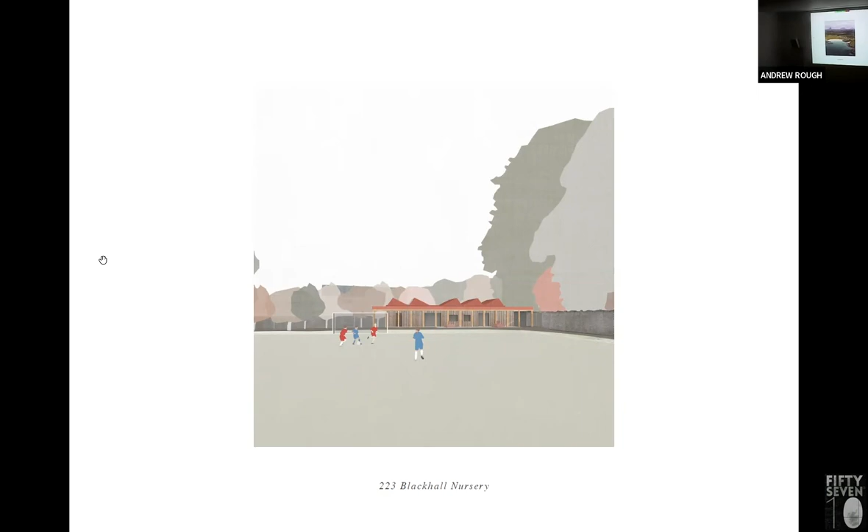We're also involved with Assynt Development Trust up at Achmelvich, which is an extraordinary location. It's a very popular beach, and they have significant issues, particularly on nice days, with car parking and toilet facilities, etc. So the trust, we bid for this and won it, and the trust have asked us to look at how we might extend the car park, make it more efficient in terms of what's there already, as well as a single-story porta cabin of toilets that are currently on the site.

So what we're proposing here is, again, using solid timber construction. We're thinking and exploring the use of dowel laminated timber, which is solid sections of timber literally laid with timber nails, effectively, that build it up in layers. Essentially the whole built form will be formed in a dowel laminated timber construction.

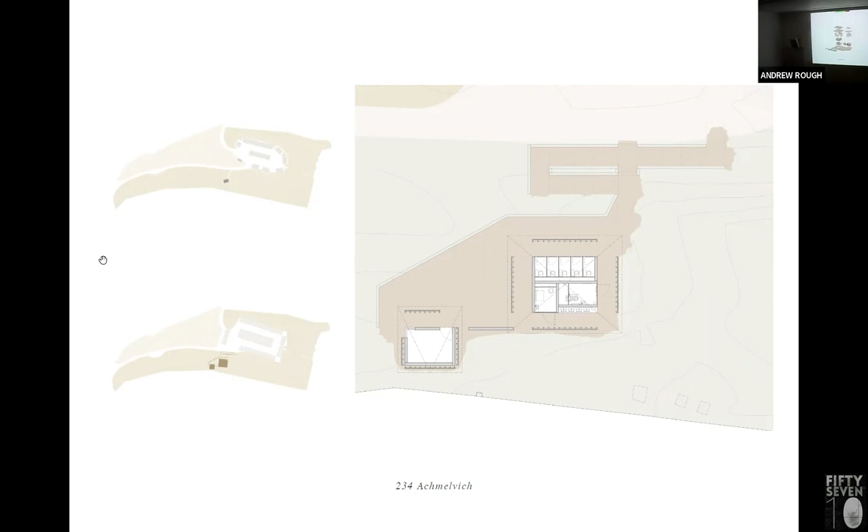We're creating this veil externally, so you move round the perimeter with a veil of lightweight timber with an oversailing roof on all four sides, and then you move into the private space, etc. And then how we might take some of the qualities of the natural landscape and literally place that onto the roof, so that the building beds into the landscape and feels like it's always been there.

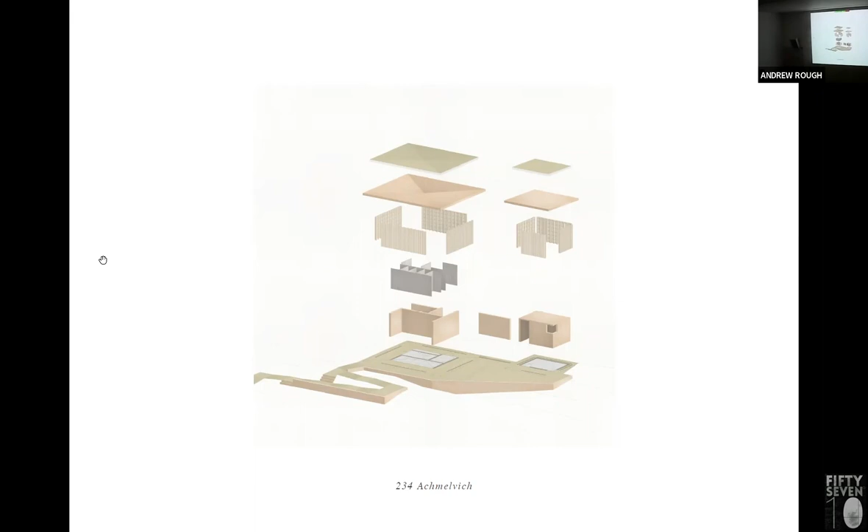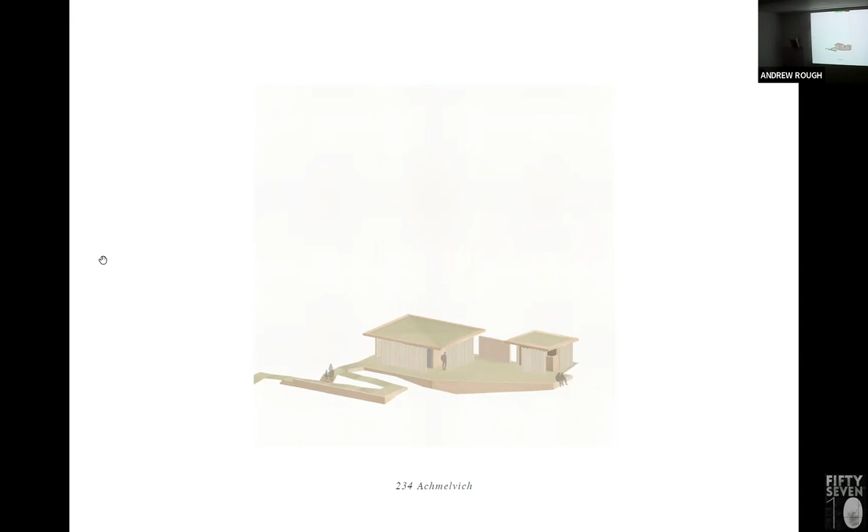This again has gone out for funding. We've got detailed planning consent for this, and it's effectively waiting for the go-ahead to proceed.

And then most recently we won a competition for a new housing master plan in Stromness up in Orkney. Malcolm Fraser Architects have already worked in that location.

That was completed just as the office closed.

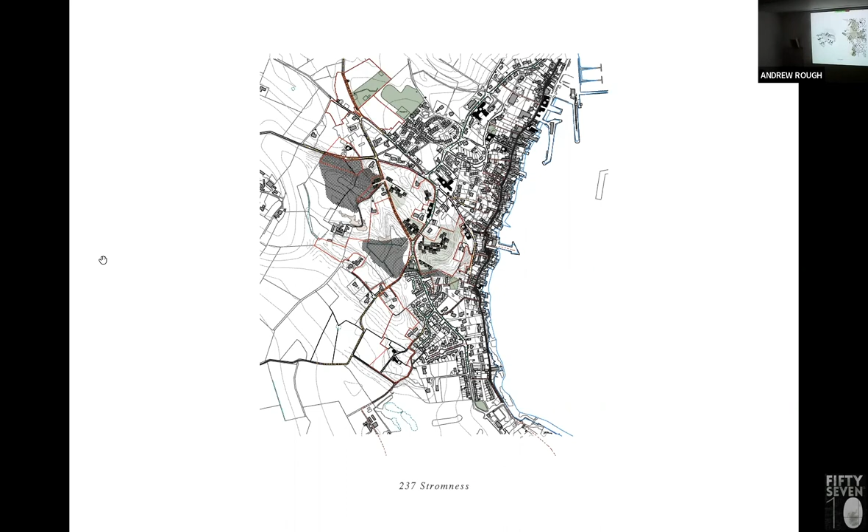We're working with what's there, as well as trying to make it of Stromness as well. So these are just some very early patterns of thoughts.